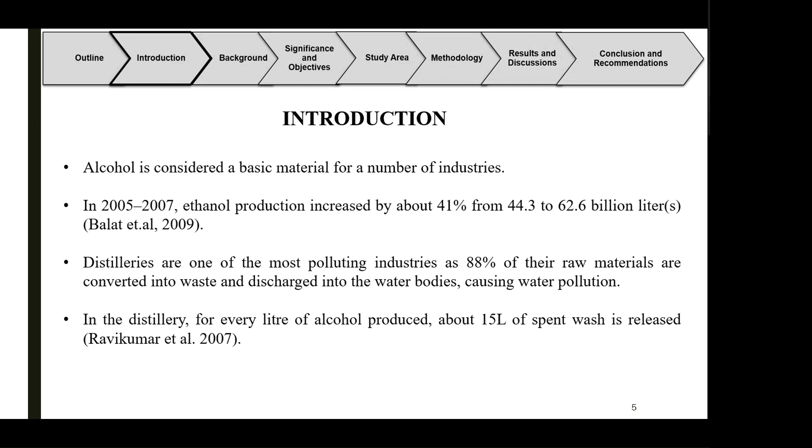Introduction: alcohol is considered a basic material for a number of industries, as we all know, for example chemical, pharmaceuticals, cosmetics, beverages, food, etc. So the number of alcohol industries is increasing worldwide. Thus, from 2005 to 2007, ethanol production increased by about 41%, from 44.3 to 62.6 billion liters. Distilleries are considered one of the most polluting industries, as 88% of the raw materials are converted into waste and discharged into water bodies, causing water pollution. In the distillery, for every liter of alcohol produced, about 15 liters of spent wash is released, so you can imagine how much wastewater is being produced.

Just a little background: currently, alcohol production is based on the use of non-waste agriculture substrates such as cereals, potato starch, etc. On a global scale, about 47% of ethanol is produced from sugary raw materials. There are 4 stages of alcohol production in distilleries: first, feed, where ethanol production raw materials containing nitrogen and phosphate supplements are used. Then comes fermentation, in which yeast is used, for example Saccharomyces, which converts carbohydrates into alcohol and then settles into sludge at the end of the process.

The mass after fermentation contains 8 to 10% ethanol. Then in the distillation column, the alcohol is separated as the top product, and the bottom product is a brownish liquid known as distillery stillage. Then comes finally the packaging and delivery to clients. Currently, in some countries, byproducts from the distillery industry are used for direct soil fertilization due to their high content in nitrogen, phosphorus, and organics.

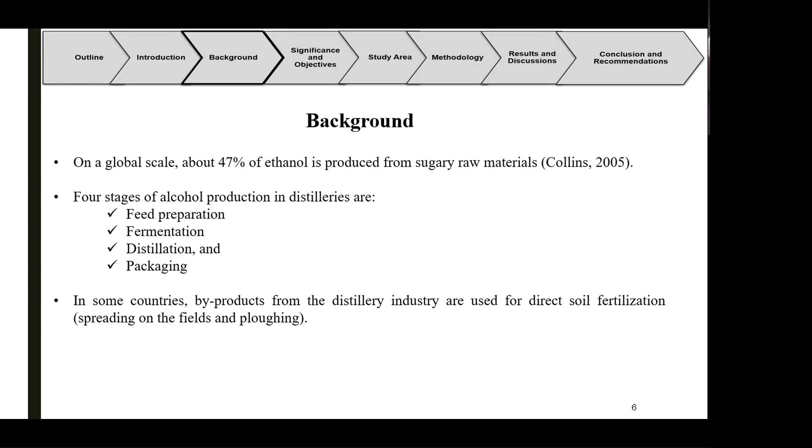That movie... I think this is stuck. Yeah, we see the same slide.

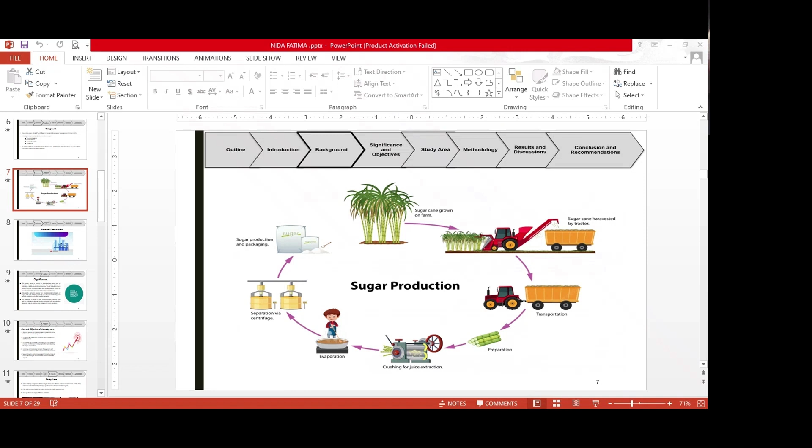Okay, sugar production. This is the general view of sugar production, how sugar is produced: sugar cane from the fields is harvested and transported to the sugar mill, where it is crushed for sugarcane juice extraction, evaporated in a large pan, and then separated via centrifugal machines. The final product is then packaged and delivered.

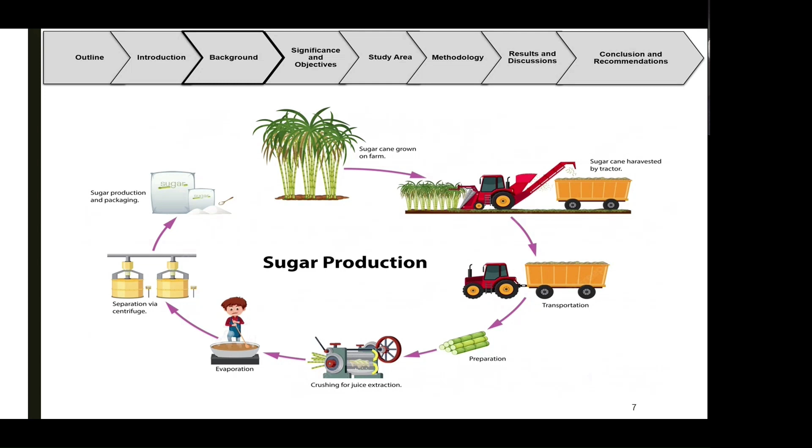Now let's see in a short video how ethanol is being produced in the current study area.

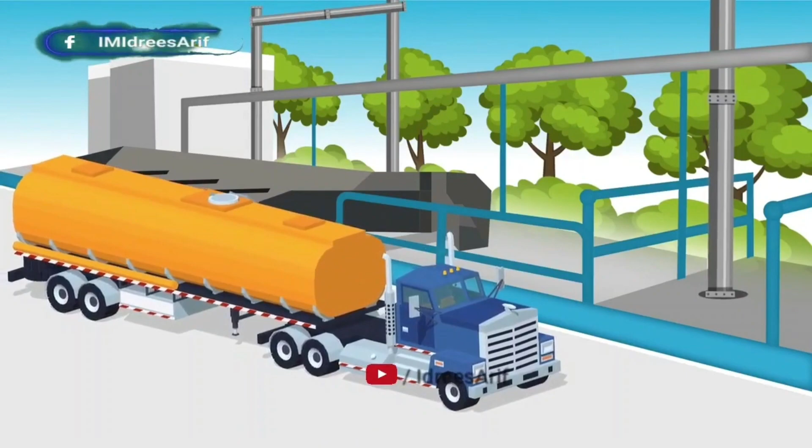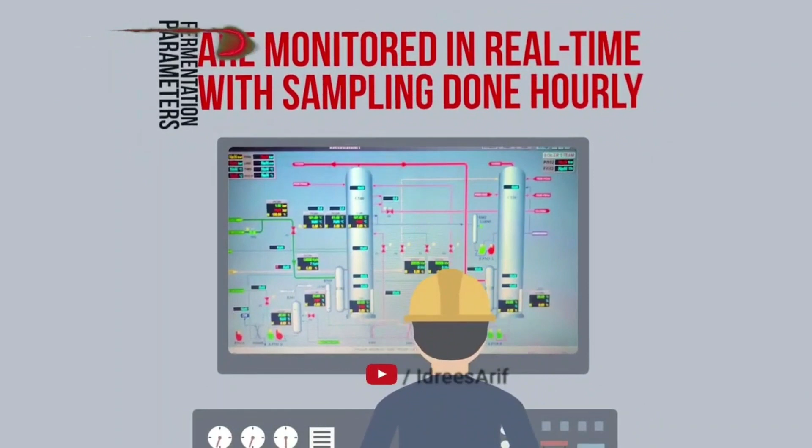We have always made quality our number one priority. We have in-house labs at all of our plants that meet international safety and quality standards. Our quality control process begins at the raw materials stage, where we have fully covered molasses tanks for our in-house feedstock, which happens to be the largest amount of captive distillery feedstock in Pakistan. When we buy feedstock externally, we test prior to purchase, individually monitor each shipment, and have an imported seal technology to prevent tampering. During the fermentation process, fermentation parameters are monitored in real time with sampling done hourly. We also import our yeast from the United States to ensure high yields and the purity of our product.

Once the product enters the distillation process, we collect samples every 30 minutes to ensure moisture percentages are tightly controlled and impurities are kept to a bare minimum. The odor and appearance of the ethanol is also closely monitored.

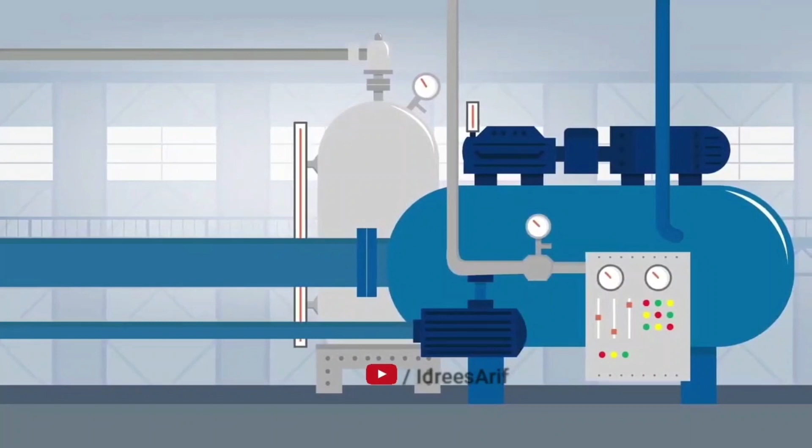After the distillation process, the ethanol reaches an intermediate tank where it is immediately sampled and tested to make sure it meets our strict quality standards. Before the intermediate tank is emptied, the ethanol is tested again. Once in general storage, the ethanol is sampled and tested daily to ensure it maintains the properties and quality it had upon entering the storage tanks.

Finally, prior to loading from our distillery's storage tanks, the ethanol being sold is sampled and tested again to ensure there is no variation in quality parameters.

Okay, now you have already seen what happens in this industry. It's a general process as occurred in every distillery and a sugar mill. Now let's move on towards the significance of the study that I have done.

Then you can see that from air pollution, asthma and other different diseases are attacking people living near the vicinity of these areas. Also, increased transportation is causing a major threat to wildlife in the area, and wildlife is suffering from habitat loss due to frequent disappearing of forests only for the sake of industrialization.

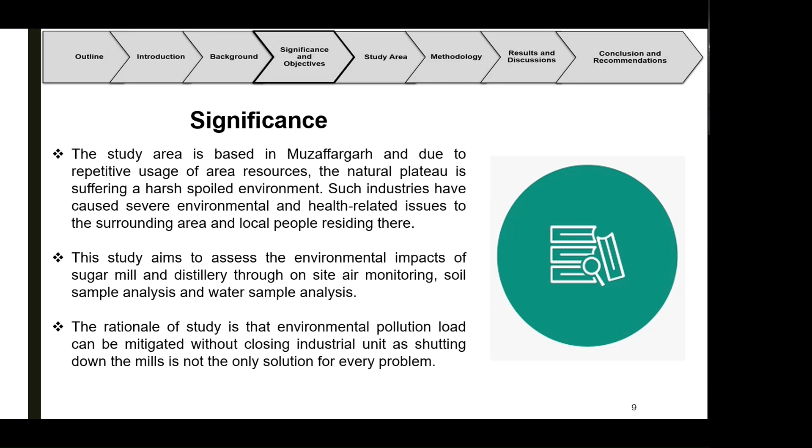So this study aims to assess the environmental impacts of such industries through air monitoring on-site, soil sample analysis, and water sample analysis. And the rationale of the study is that the environmental pollution load can be mitigated without closing industrial units, as shutting down the mills is not the only solution for every problem.

These were the aims and objectives of the study: monitoring various environmental quality parameters of air, water, and soil; to inspect the wastewater pollution load in sugar mill; to evaluate the pollutants concentration in air; assessing environmental impacts of sugar mills; and then suggesting feasible and environmental friendly actions to resolve and mitigate adverse health and environmental impacts.

They have two main labs run by multiple professional chemists and biologists. The distillation columns are made from high-grade stainless steel, which prevents corrosion and thereby protects the ethanol from impurities. End products produced were sugar, ethanol, and carbon dioxide.

The raw material for this sugar mill was sugarcane, while that for the distillery industry was molasses collected from the respective sugar mill. Molasses from sugar operations is stored in fully covered tanks to prevent excess moisture loss and to ensure sugar content is retained.

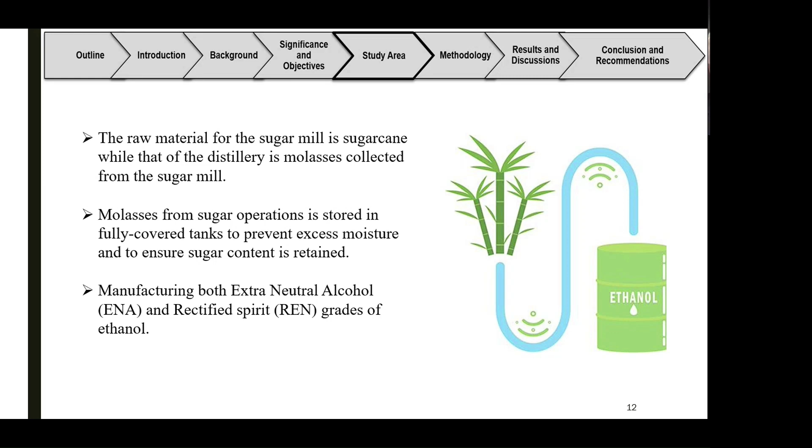This industry is manufacturing both extra neutral alcohol (ENA) and rectified spirit (REN) grades of ethanol as well.

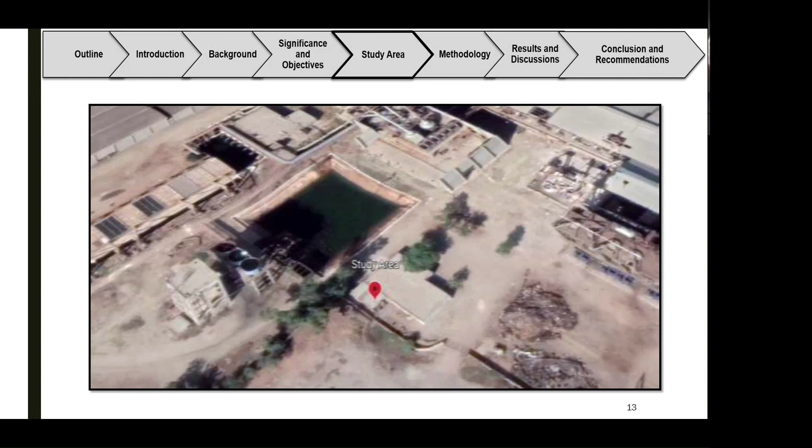Let's see what methodologies were adopted during the whole assessment. This is a general or universal method that can be used for conducting environmental monitoring and impact assessment of any industry in the world. First, secondary data was collected through a complete literature survey and comprehensive information regarding sugar and distillery industry and its adverse impacts on the surrounding environment. The baseline study of the research area was carried out and impacts were noted down as well.

Then primary data was collected through a reconnaissance survey. A thorough site visit was conducted in which various samples were gathered and relevant checklists were filed respectively. In the present study, we researched essential environmental quality parameters like water, soil, air, and noise. Noise and air pollution were monitored on-site through various instruments, while water and soil samples were taken and later analyzed in the lab.

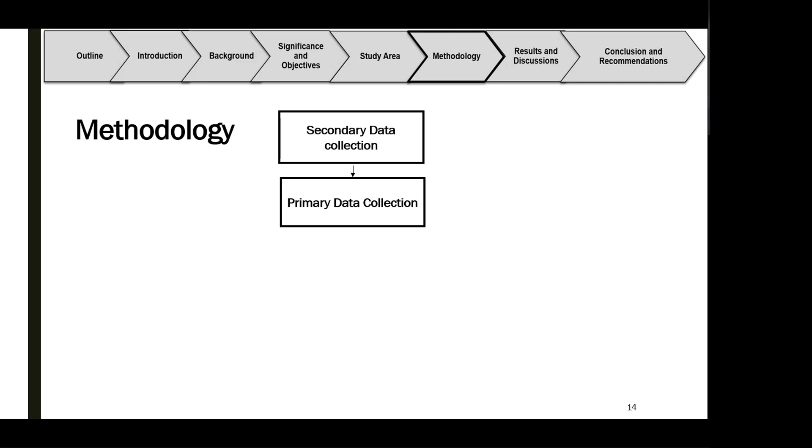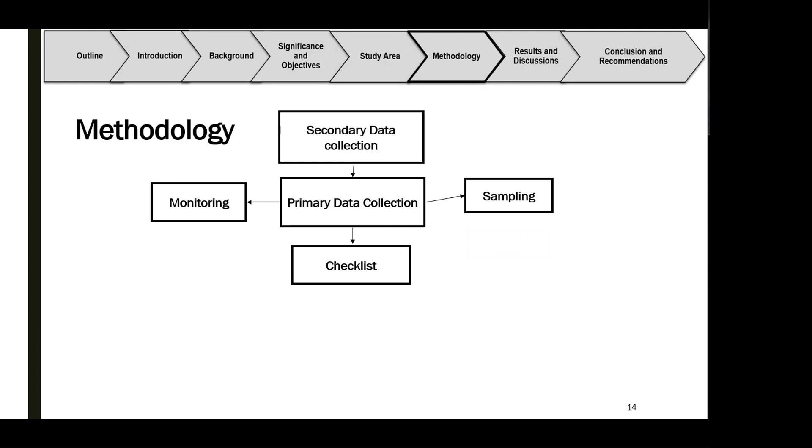In primary data collection, we have sampling, checklist, and monitoring. In the checklist section, for assessing the social impact of the industry, general public interviews were recorded on a form and a checklist was filed to estimate whether local people are accepting the industrial working areas or not. In the sampling section, we collected samples of wastewater, groundwater, and soil.

All the samples were collected by adopting proper standard methods for examination of water and wastewater by APHA USA. Samples from the canal were collected from locations where the water was well mixed, homogenized and flowing, whereas grab sampling method was used for process and wastewater sampling.

For groundwater sampling, we collected samples at a depth of 200 feet at the project site. Values for TDS, chloride, pH, sodium, turbidity, and other elements shown in the slide were analyzed. Similarly, parameters like pH, sulfate, chloride, fluoride, etc. were analyzed by taking soil samples from the study area.

For the monitoring section, we have noise monitoring and air monitoring. Ambient atmospheric quality parameters like nitrogen dioxide, carbon monoxide, sulfur dioxide, carbon dioxide, ozone, and PM10 were monitored at various points, as will be shown in the results section later on. Noise level monitoring was done in decibels at 3 points: start, mid, and end of the project site.

On-site monitoring apparatus and sampling materials were required for the site survey and monitoring. A HAZ scanner was used for measuring atmospheric gases, while a digital sound level meter was used for measuring the noise level at the project site. For water and soil samples, various laboratory instruments were used, for example, titration assembly, atomic absorption spectrophotometer, and flame photometer, to analyze various elements in the soil and water body. For the reference methods of each parameter, you can check my thesis in detail. At last, the data was analyzed and results were interpreted accordingly.

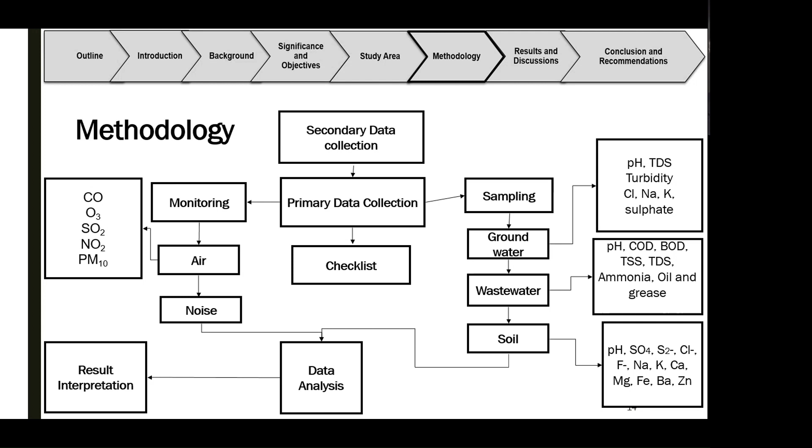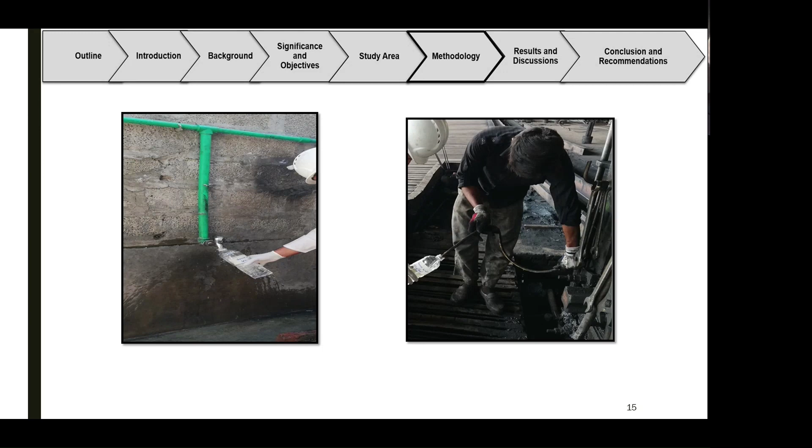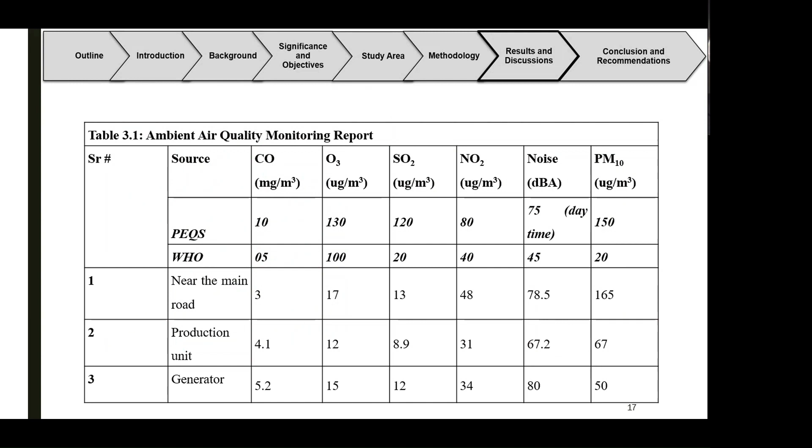It also shows that concentrations of carbon monoxide, ozone, sulfur dioxide, and nitrogen dioxide are below PEQs, while noise and PM10 are higher than PEQs near the main road and generator site. PEQ stands for Pakistan Environmental Quality Standards, also called NEQs, National Environmental Quality Standards. These are the standards set by the government for industries regarding allowed air pollutant or noise levels for a specific period of time.

However, in case of WHO standards, i.e. World Health Organization standards, levels of sulfur dioxide and ozone are below standards, but concentrations are higher for carbon monoxide, nitrogen dioxide, noise, and PM10.

If you are not familiar with PM10, PM stands for particulate matter that is hazardous, inhalable, inorganic or organic particles which remain suspended in the atmosphere and have significant environmental issues. They can be of different sizes, but the most common thought to be hazardous are PM2.5 and PM10. 10 means size equal to or smaller than 10 micrometers.

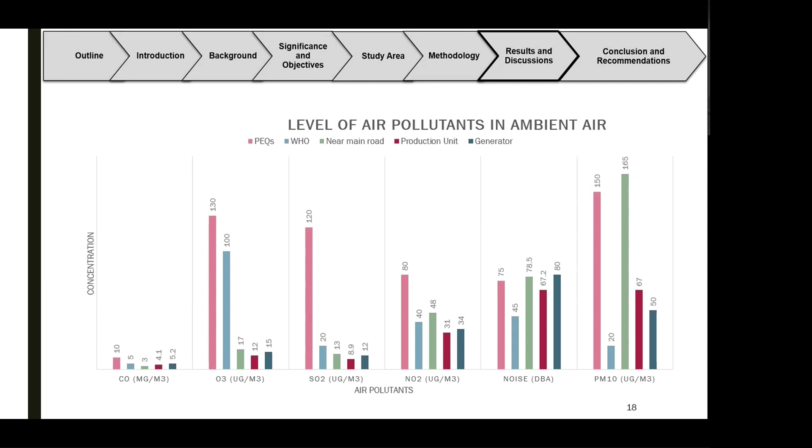This table shows the chemical analysis report of a soil sample. Various mineral concentrations were analyzed and arranged in tabular form, and this figure shows the graphical representation of the composition of the soil sample with different minerals and their concentrations. Among anions, sulfate and chloride have the highest concentration, while among cations, calcium and sodium are rich in concentration. The remaining mineral components were found in the least amount, and none of the heavy metals were detected in high concentration.

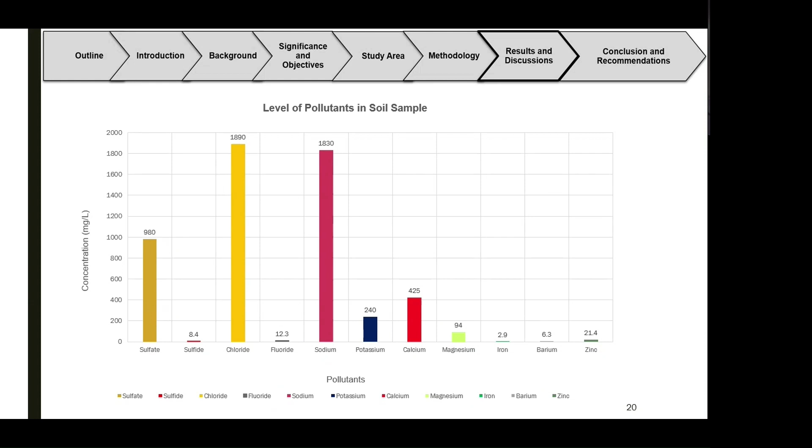Dissolved salts are the main reason behind high TDS content, total dissolved solids. However, turbidity is within the allowable limit of PEQs. Turbidity is considered the second key parameter for testing whether water is polluted or not.

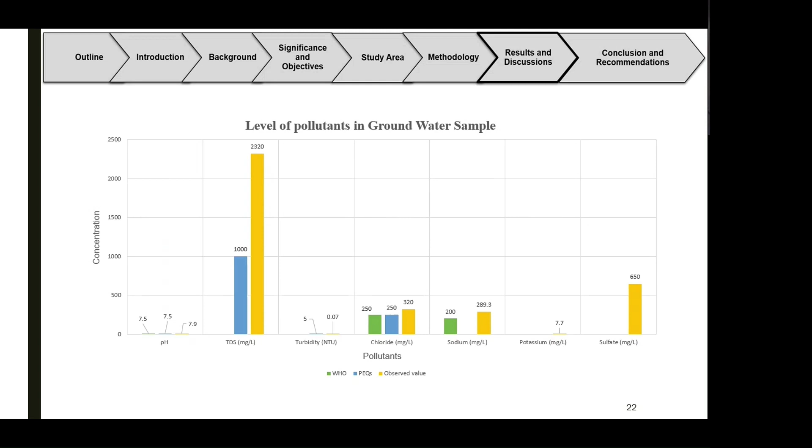Turbid water is not necessarily hazardous. Some minor treatment technology may improve water quality, including sedimentation or coagulation and flocculation techniques. Moreover, potassium and sulfate were also detected during the analysis.

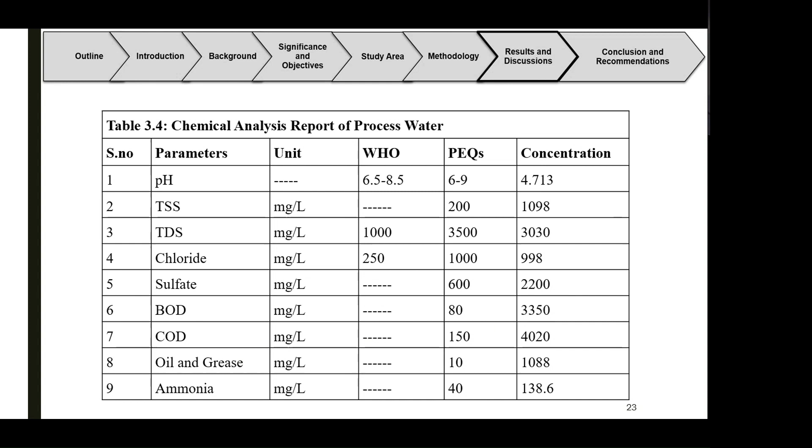Now comes our last chemical analysis report, that of processed water, and this figure shows the comparison among different concentrations of processed water pollutants at the project site. It describes that the concentration of every variable observed in the processed wastewater is above the permissible limit. While chloride concentration is only above WHO standards, it is just touching the borderline of PEQ standards.

People may not know about the terms COD and BOD here. COD stands for chemical oxygen demand, while BOD stands for biological oxygen demand. Both are measures of the amount of oxygen required.

COD means the measure of the amount of oxygen required to oxidize a particular amount of organic matter in wastewater using a strong oxidizing agent. But in BOD, we use aerobic microorganisms over the course of 5 days. So in COD we use a chemical agent, while in BOD we use microorganisms.

The graphical representation shows that the COD value is greater than BOD in the processed water. This is because COD is the most accurate method for measuring concentration of organic matter in wastewater, since a strong oxidizing agent is used. That's why you will observe values of COD will always be higher than BOD.

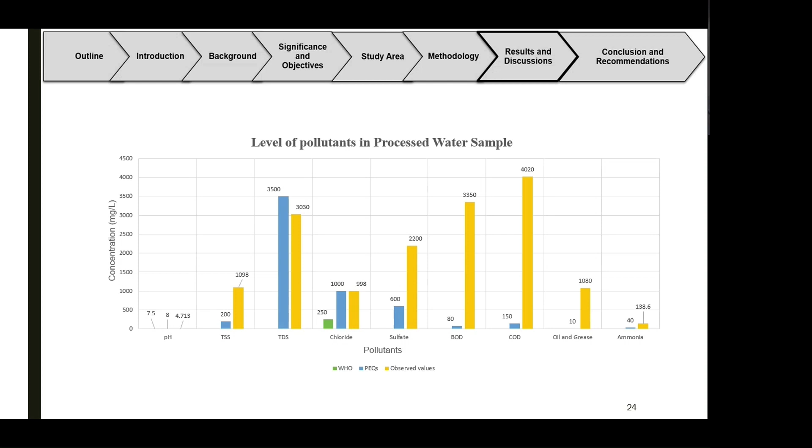Conclusion: on the basis of the given evaluations and analysis report, it is concluded that the current sugar mill and distillery can continue operating under controlled circumstances and mitigation measures. However, further steps should be taken to mitigate potential hazards in the already stressed environment and pollutants. Concentration of pollutants should be lowered to the already set respective standard values, so that without shutting down the industries, the environment could be saved and the country's economy should progress simultaneously.

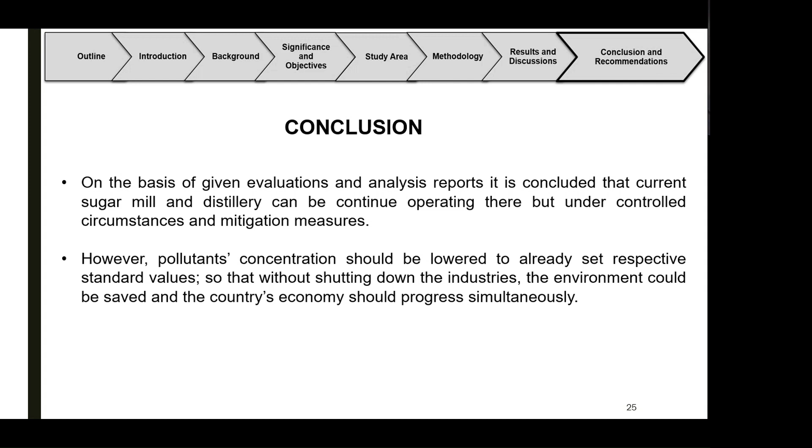The present study also concluded that distillery industries use a huge amount of water, various types of chemicals and raw materials in the production of alcohol, which generates high strength wastewater. Due to very high BOD and COD, this wastewater is considered an environmental hazard for both the water body as well as soil, as the water will seep through the soil and enter the groundwater that we will drink later on.

Thus, there is an urgent need to address the limitations in existing methods and develop integrated treatment processes that provide a complete solution to the treatment of distillery wastewater. Immediate actions and specific policies will be required to minimize the different sources of pollutants over time. Moreover, there is a need to develop specific EIA, environmental impact assessment, and environmental monitoring guidelines, as the unmonitored running of such industries is causing severe damage to our atmosphere.

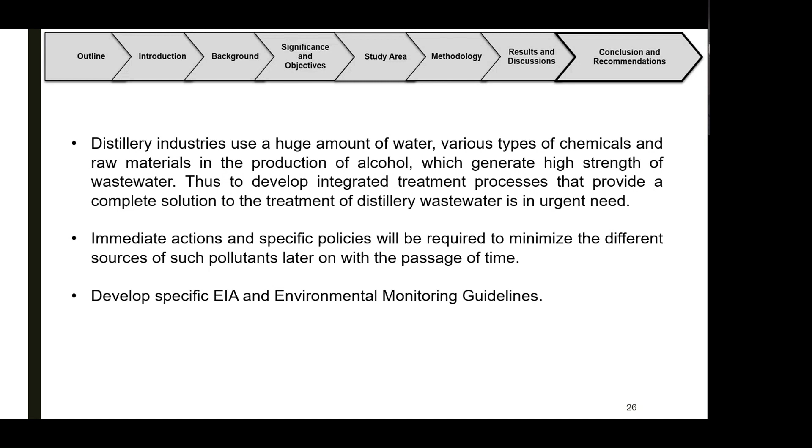As can be seen from all the above analysis, monitoring reports both on-site and laboratory, and issues explained by the local communities, installing a new plant in such a scenario in an environmentally disturbed area is both socially unacceptable and environmentally non-feasible. Based on current studies, some recommendations are given for the operation of sugar mill and distillery in proposed areas.

So as to lessen or minimize potential negative impacts: First, consideration of potential air emissions and appropriate control measures like dust control measures for PM10, and periodic monitoring of emissions. Second, waste heat recovery technology should be introduced in the plant to save the country's energy resources.

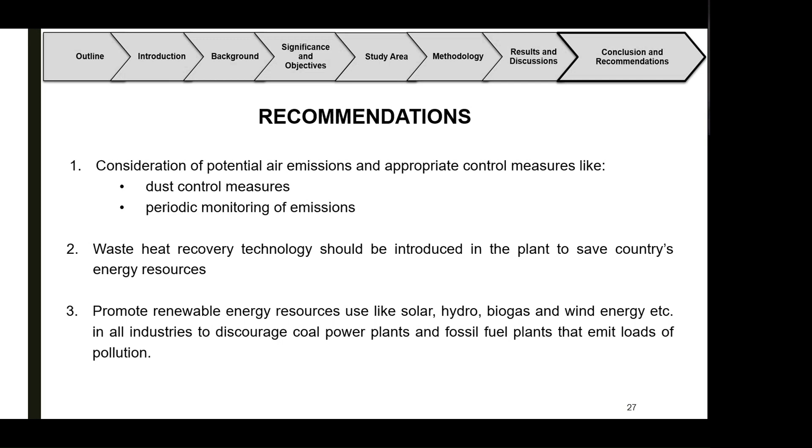Third, promote renewable energy resources like solar, hydro, biogas, and wind energy, etc., in all industries to discourage coal power plants and fossil fuel plants that emit lots of pollution, thus growing sustainably in the industrial sector and promoting a green economy. Fourth, as we know Pakistan is currently facing water shortage problems, thus industries should use water consciously.

And must follow water conservation practices. Fifth, workers must wear PPEs, which stands for personal protective equipment, like helmets, etc., while working in any industry where the probability of hazard is maximum.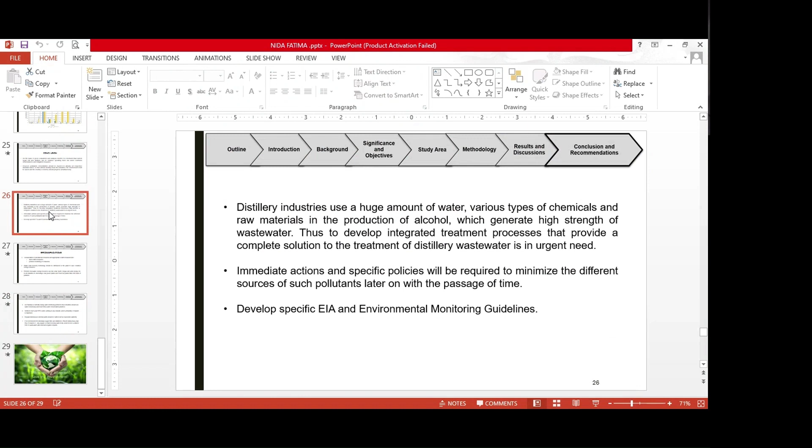But before we do that, the last point that you raised in your presentation referred to these climate problems that we have heard in Pakistan. How is the situation now in your area, and how much affected was the area of the distillery that you are analyzing?

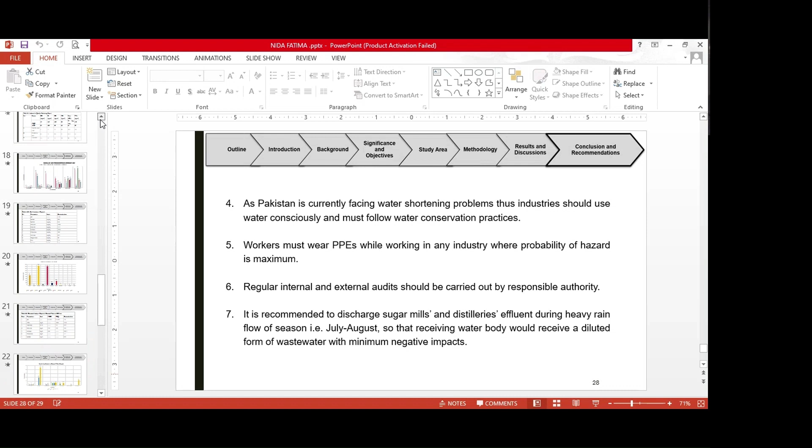The distillery, during the process of thesis working over there, I analyzed much suffocation in the air, as air pollution was a lot. I have shown in my presentation, there were a huge amount of pollutants emitting from the industry. No, I was referring to the exceptional rain seasons that have affected Pakistan.

Yeah. This is due to the fact that many industries are emitting pollutants and they are gathering in the environment, and due to that the raining season or the climate has changed so much. If you ask me, that region used to be much colder in October season, but now it's too hot over here. So there is climate change and that is impacting the raining season as well, but mostly raining season starts from July to August here in Pakistan.

All over Pakistan, it's not being affected that much. So industries are allowed or permitted to discharge their wastewater during that season, so that the pollution load in the streams or canals or rivers can be controlled.

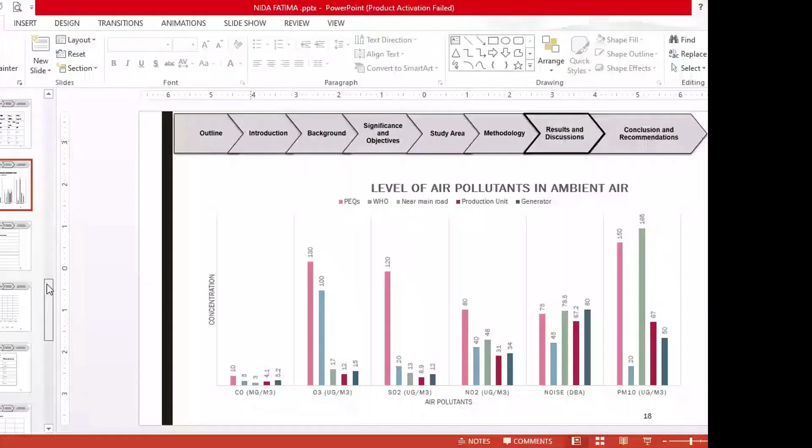Yeah, I have mentioned in my presentation already in the methodology section that this is the general methodology that I followed. Maybe you have seen that. I first did a secondary survey, collecting the data regarding the issue or the site that I'm going to study.

Then I collected the primary data through sampling and checklist and monitoring. For sampling, I have listed the parameters, and for monitoring as well. For checklist, we went through a list of checklists that I have attached with my thesis in the appendices, to see what people think. Then after gaining the results from the groundwater, wastewater, soil, and air, we analyzed the data and the results were interpreted as shown in the graph.

So yes, this is a general methodology. You can use it everywhere, in any industry, not only the sugar mill or distillery. This is the general approach.

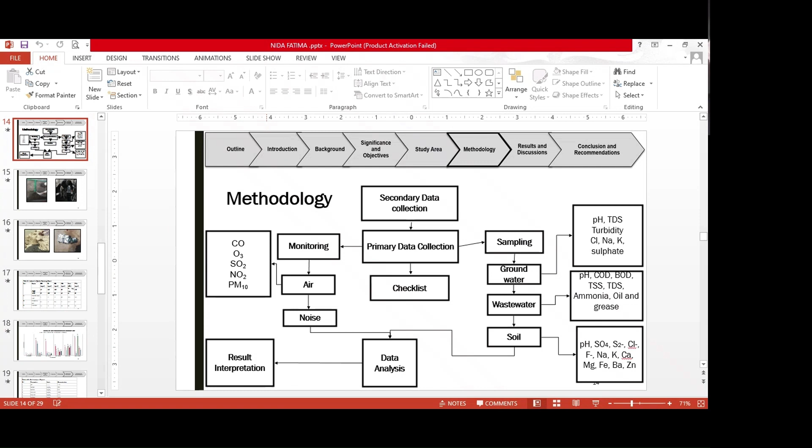No, no, no, it's not possible to get the data behind their backs because I was an internee, not a worker there, and an internee has a boss with them every time they move. So I gathered the data with a friend I have over there, using their instruments and their tools. I don't have a HAZ-Scanner - that's a big tool, you can check it out, I can't afford that. So the HAZ-Scanner, digital sound level meters, every tool, and even the laboratories, were used by them.

I just gathered the data from their files. I asked permission from them: can I use your data in my thesis? I told them I will not let their name be exposed, and only then did they allow me. So they know I have their data and that I've already used it in my thesis. That's why they allowed me to use it, but without using their name.

Okay, that makes a lot of sense. Yeah, I was thinking just about the NDA when you said it. Yeah, that was obviously - that makes a lot of sense. Yeah, thank you. Thank you, thank you.